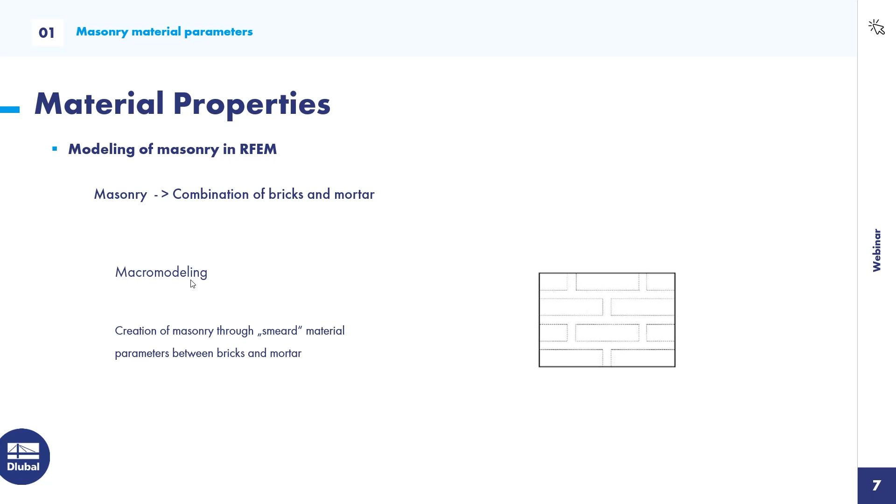The third and easier modeling approach is macro modeling. Here you create the masonry as one surface, and the material models and parameters between the bricks and the mortar are smeared across the whole surface. This means the modeling is easier and faster than the other two options. One small disadvantage is that if there is a crack anywhere in the masonry wall, you could not exactly define the location, maybe in the mortar joint, because the parameters are smeared across the whole surface. But this macro modeling is what we use in RFEM.

So what do we need for material parameters in RFEM? For the first step, for computing the internal forces, we only need the modulus of elasticity and the shear modulus. This is everything we need for the first step.

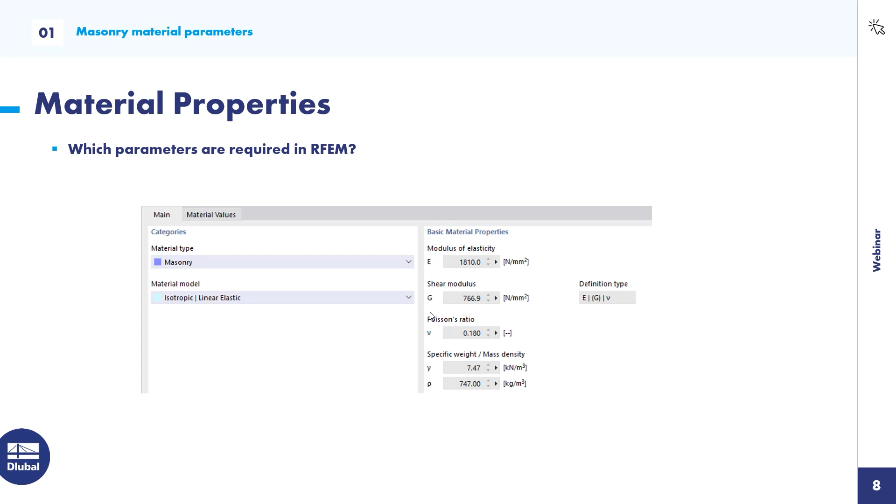So how could we get an idea about this elastic modulus and shear modulus? Here we find an answer in the Eurocode. The determination of the E modulus is defined by one factor: about 1000 for clay, in a range of 800 to 1250 for calcium silicate, or maybe 2050 to 2700 for manufactured stones.

This factor multiplied with the characteristic strength FK gives the E modulus. For small stones, for historic stones, you can add a factor for a small reduction of the E modulus according to the height of the brick and the reference height. The shear modulus is quite easy because it is 40% of the E modulus in this direction.

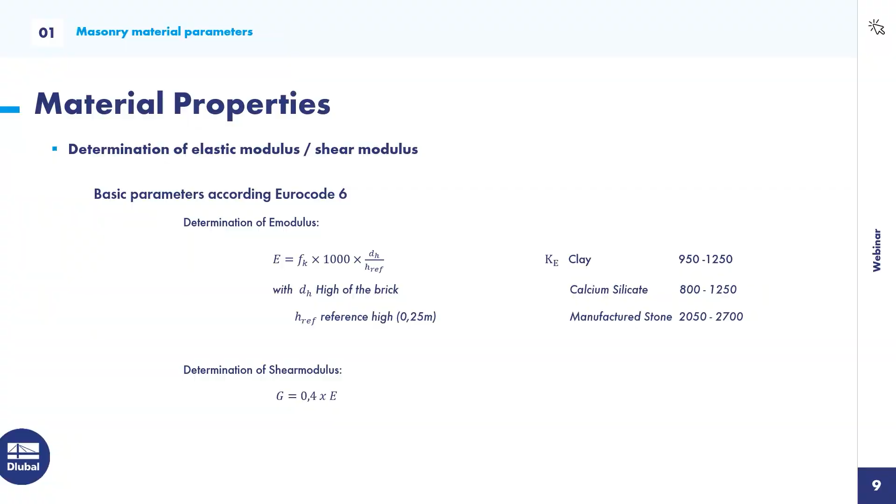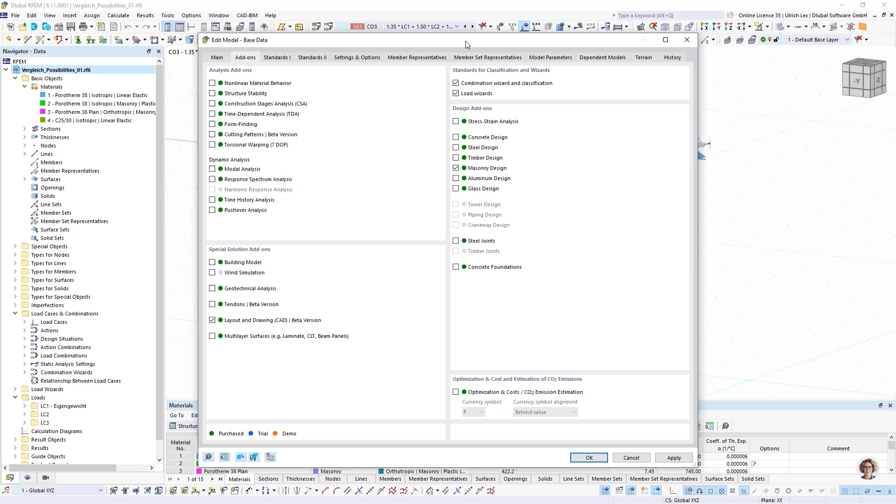As before I start modeling something, I want to check if in the add-ons in the base data my masonry design is checked on, because this is the most important thing if I want to work with masonry.

Today I prepared a small example. It's one wall with a slab and a defined load above. I want to show the differences between the material models. That's why I have created some materials, and I want to show you the differences now.

The first material is the isotropic linear elastic material model. This is our basic material model. It's the same for concrete or steel surfaces. You only need one E-module, elasticity module, and shear module to compute the internal forces.

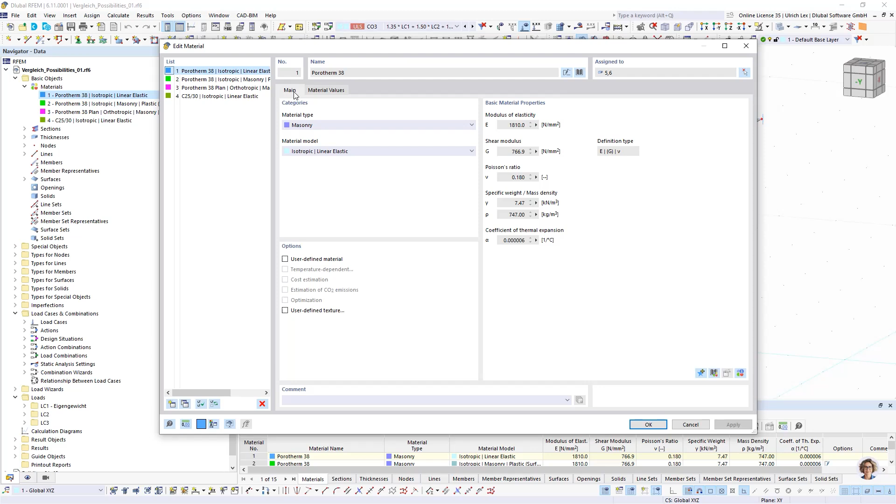When you have chosen the material type masonry, you have here the possibility to create also an isotropic masonry plastic surface material model. This means the isotropic option is that we have one E-module for both directions. In X and Y direction, we have only one module of elasticity.

With this plastic option, you can say that the limit stress for tension is reduced, because masonry cannot handle any stresses for tension. The wall will be cracked if tension occurs. The difference to the first material model is that there, tension can be computed. In this isotropic plastic material model, it cannot.

Here you have the possibility to cut a limit of tension. But be careful, directly inserting 0 is not good, because the calculation will not be good for a value of 0. So you have to insert a small value.

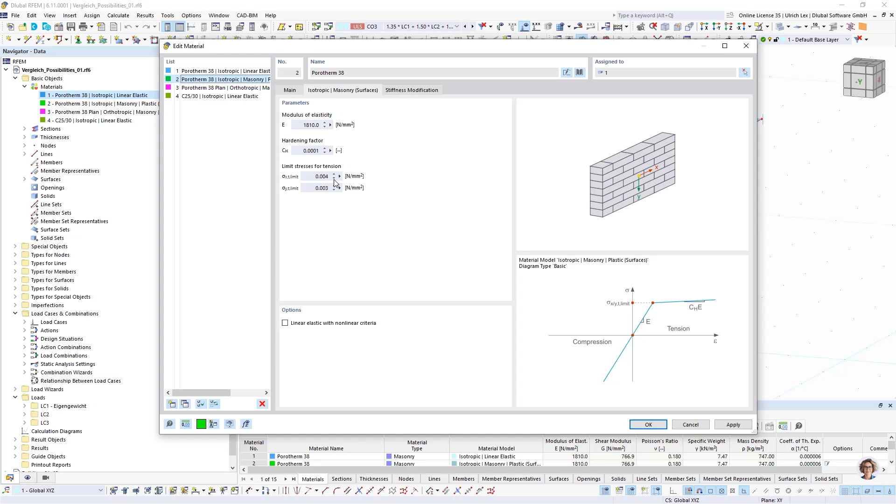The third option is the orthotropic model, and I would say it's the most exact material model for masonry, because here we have a different module of elasticity for the Y direction, the strong direction, and the X direction, the weak direction of the bricks, and a shear module is considered too.

Additionally, you can limit not only the tensile strength, we have also a limit of the compressive strength, and these allowable values from tensile and compressive strengths are computed according to the Eurocode. That would mean, if the calculation with this material model is done, then the design of this wall is done too.

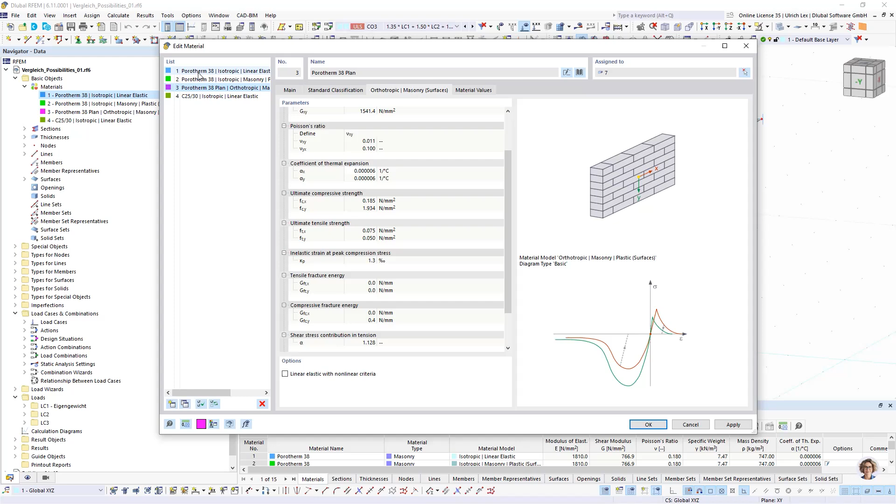So these three different material models we have in RFEM. As a last option, we have one type of thickness. We called it shear-free. You can choose it in the thickness type wall shear-free.

That means if you choose this thickness type, this wall can only transfer vertical loads from the top to the bottom, but no shear loads of the system. I will show you later where you can use this thickness type.

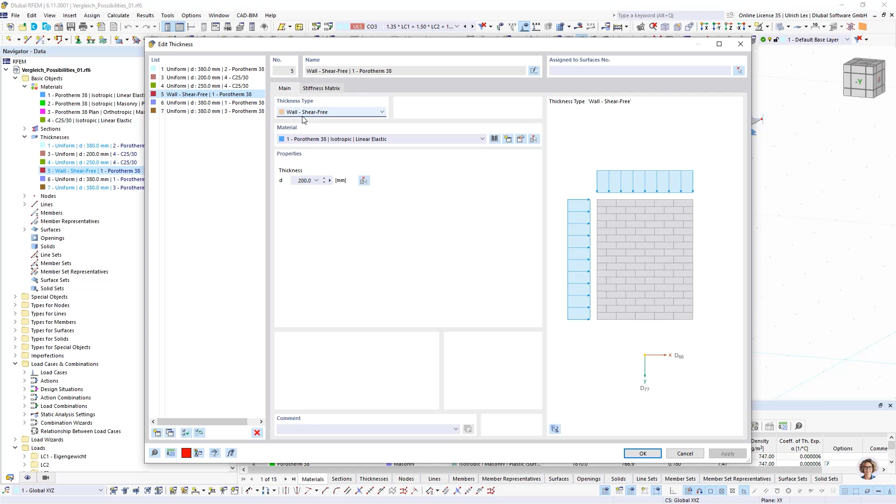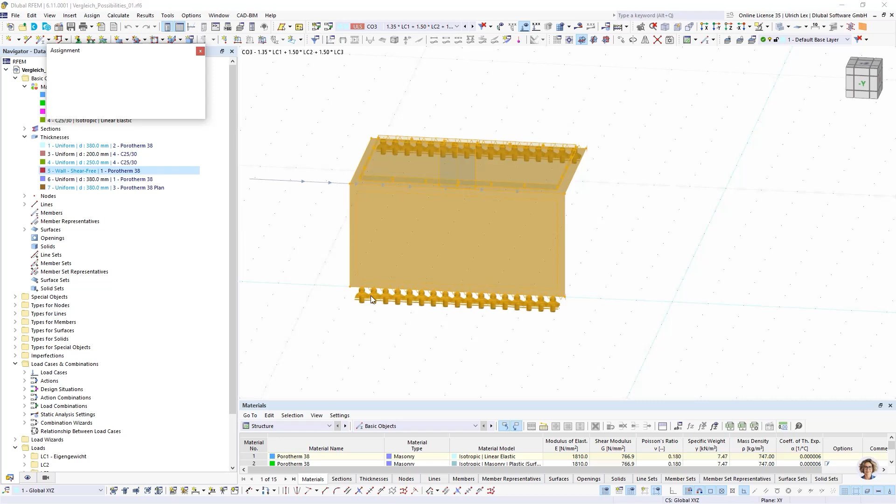Okay, to our system. Here I created one masonry wall with a slab, and I want to assign this differently. I want to create more walls with copy, maybe in this direction, and copy the loading too. 1, 2, 3 times.

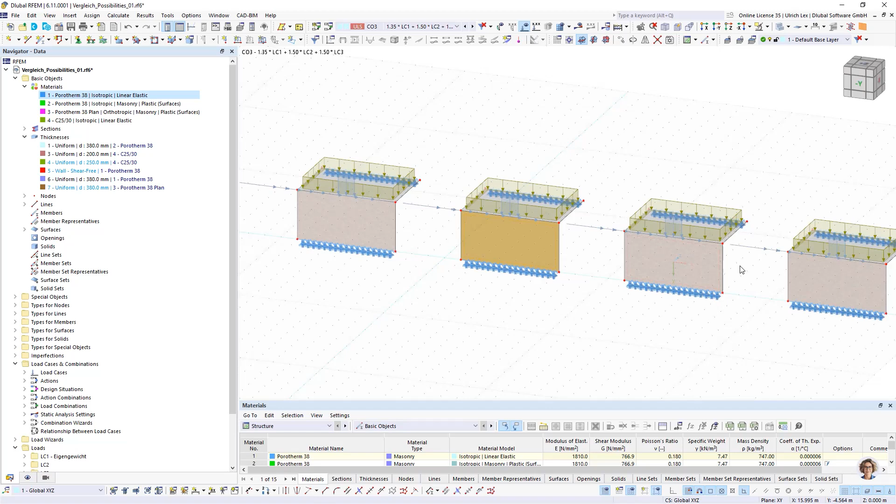So in the first wall I have to assign the isotropic material. In the second wall I want to consider the thickness with the isotropic masonry plastic. In the third case, I want to consider the orthotropic masonry plastic.

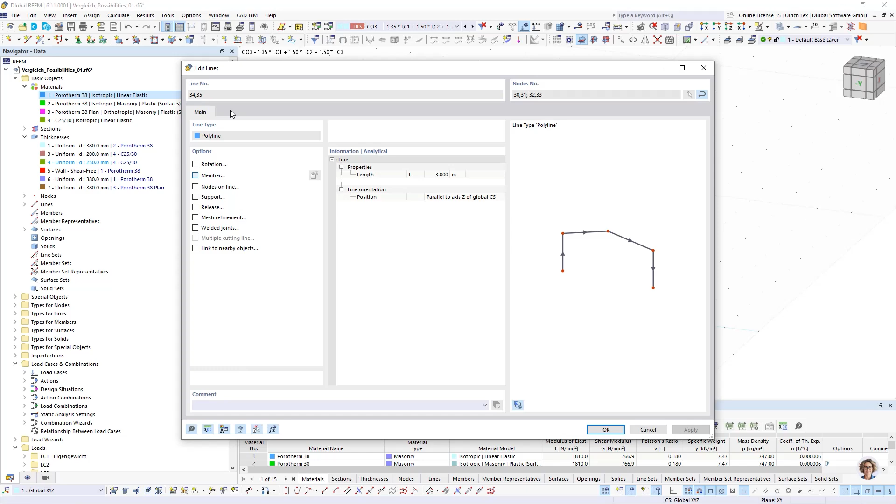And in the fourth part, I want to consider here my shear wall thickness type. For the shear wall thickness type and the horizontal load, I need some additional elements. That's why I added here 2 beams, 2 members as a column. Section from concrete. Okay, maybe for this case.

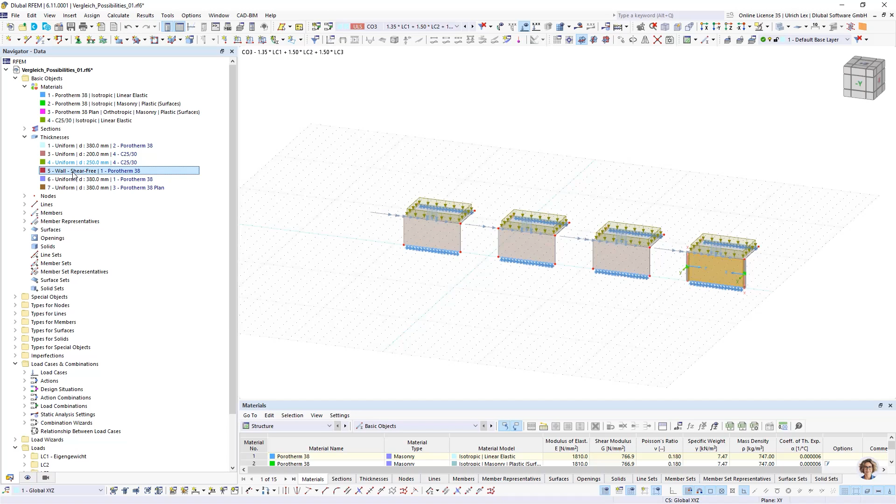So now I have defined in the first step the isotropic material model, the isotropic masonry, the orthotropic masonry, and in the last step the shear-free wall. So I want to take a look at the easiest load, the vertical load.

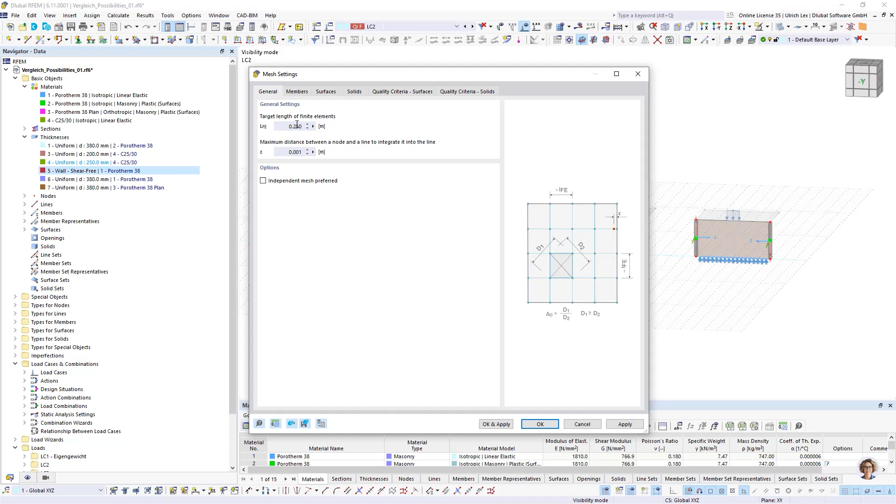A short look into the mesh settings. I have a mesh length of about 25 centimeters, and this is the value you have to use for masonry. Okay, now I can compute this first load case.

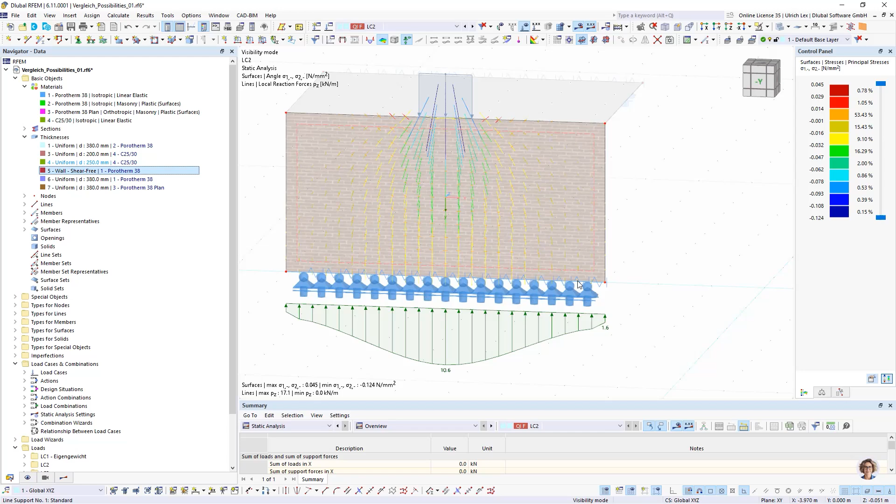So when we take a look on the results, I want to look at the stresses, and here I have something like the load trajectories, where you can see how the load is transferred in the surface. We see for our first isotropic system that the load is transferred above the whole length of the wall. This is not as expected, because we would think that the load is transferred in an angle of 60 degrees, and the other parts of the surface would not get any force. But for the basic isotropic linear elastic material model, it's not as expected for masonry systems.

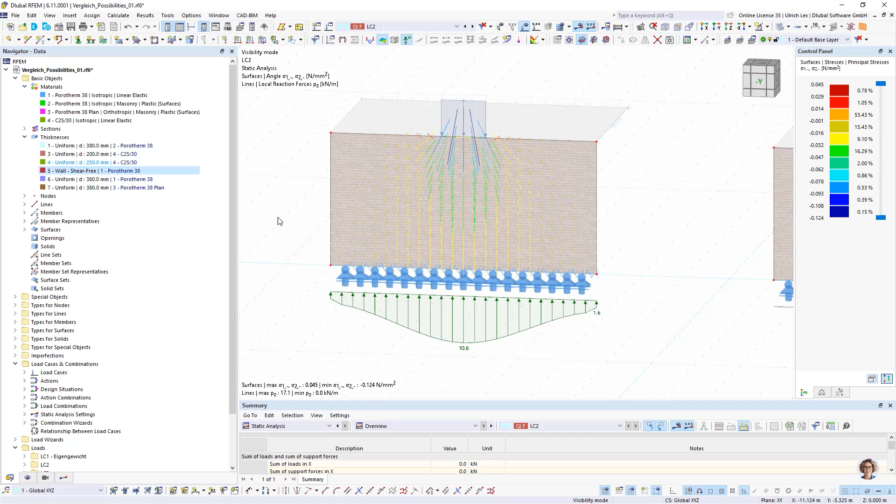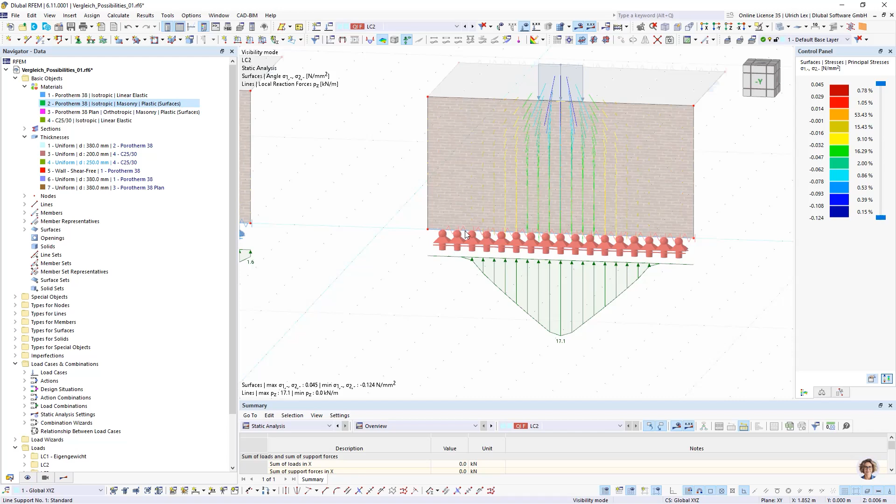When we take a look on the second system, it's better. Here we have no tension force in the system, and therefore I do not have such a big transferring to the sides. You see on the support reactions that the load is transferred in some angle from the top to the downside.

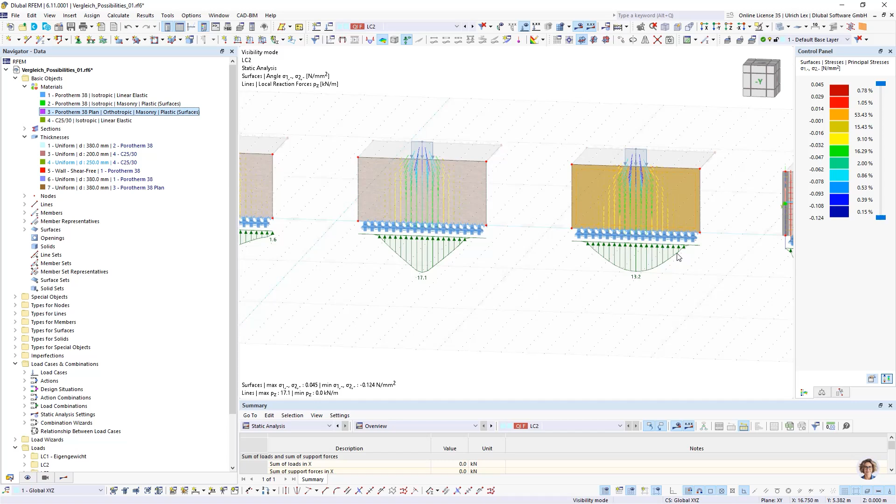When we take a look on the orthotropic system, then you can see it's better than the other two. It's more homogeneous, and it's transferred like expected.

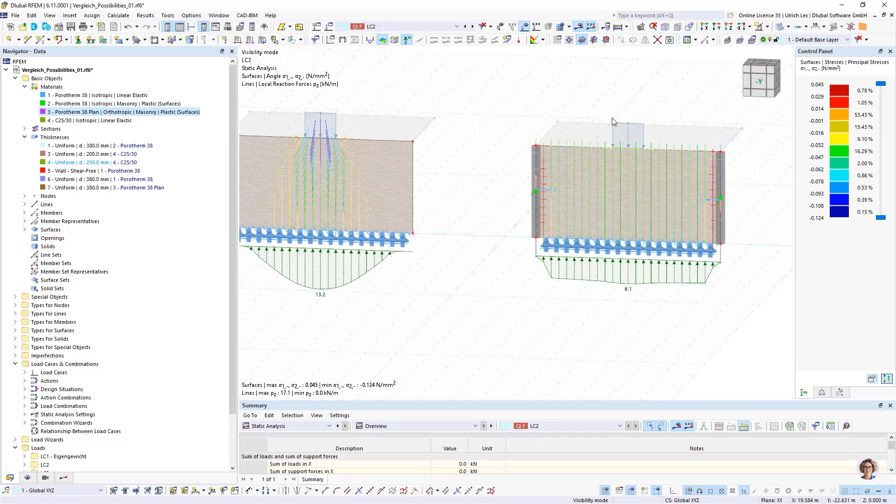In the last part, you will see that there are only vertical loads in the system because of the members on the side. You have a homogeneous transferring from the top to the bottom, but you have only straight loads in the system. It will be more clear when we have this horizontal load in the system too.

So when we add this horizontal load, then I want to take a look on the load combination, because in case of a horizontal load, you always need a vertical load, maybe self-weight or an additional vertical load too, because masonry cannot handle tension forces. You cannot compute only horizontal loads on the system.

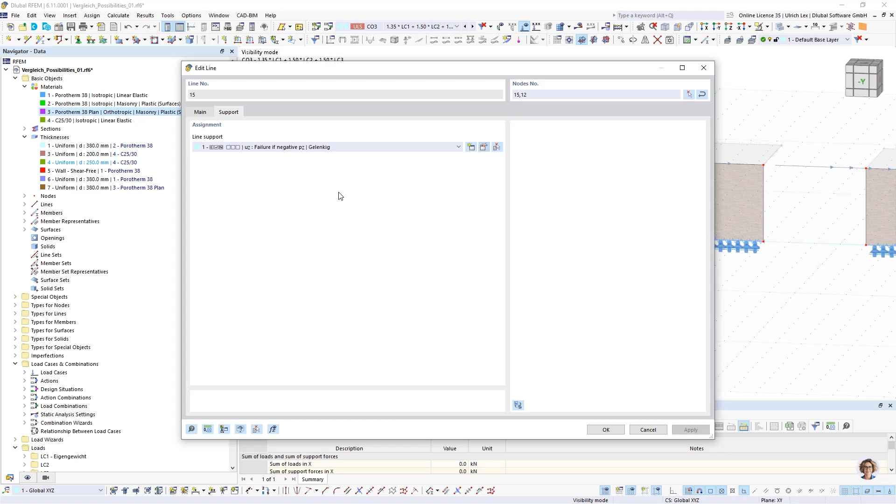For this calculation, I have to modify the support conditions. I have to fix it in X direction. And now I can compute this load case again.

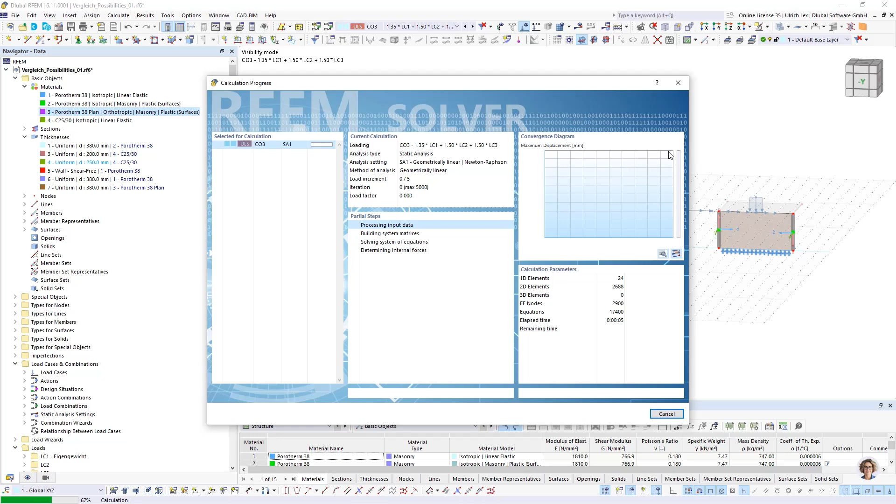Here we can again see that the load transferring of the internal force of our isotropic system is not as expected in the system. Here I can change it one more time, then it's more clear. I can deactivate the nonlinearity, so we can also see the tension in the system when we compute it again.

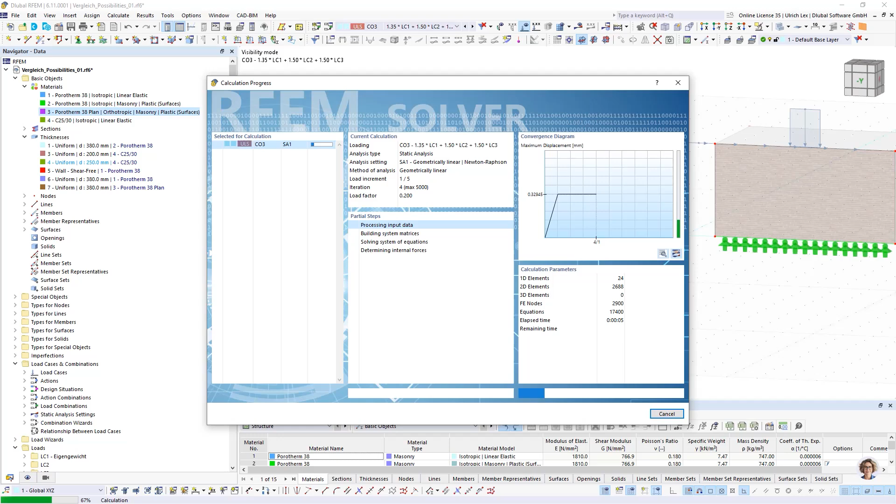Now you can see that in this isotropic material model, tension forces are also inside the surface, and therefore the load transferring is not as masonry works.

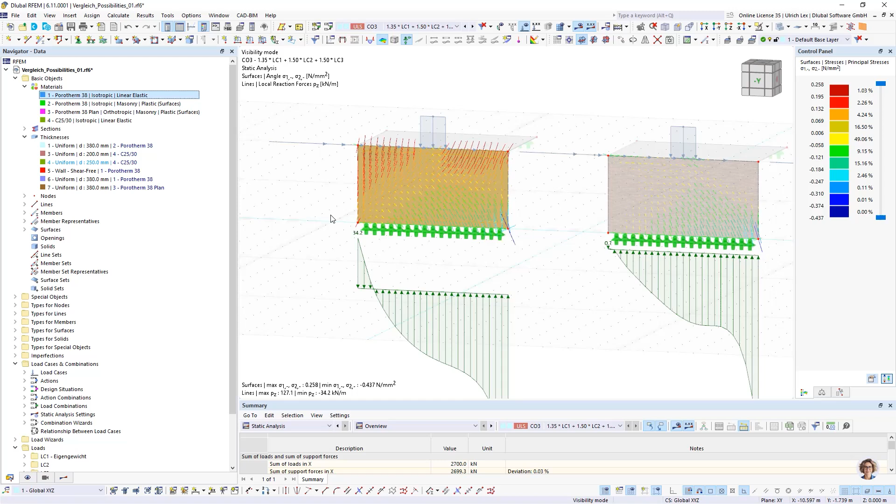So in our isotropic material model, it's quite better. You see that this horizontal load comes into the surface and is transferred in this direction to the bottom of the surface. It's like expected, but because of the fact that we have only an isotropic system, the E module in both directions is the same, and this exact shear behavior of the masonry is not so well considered with this material model.

The most exact system is the orthotropic one. Here you can see that only compression is present like it's defined in the material, and the pressure is transferred in the right way.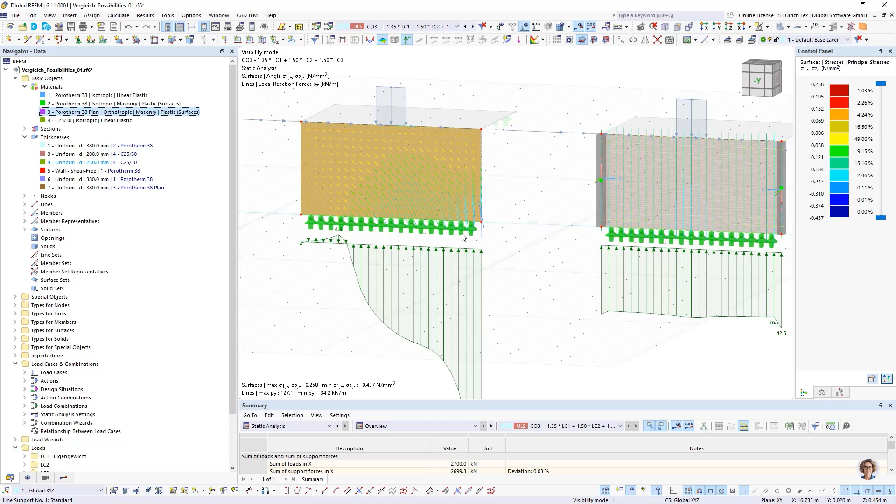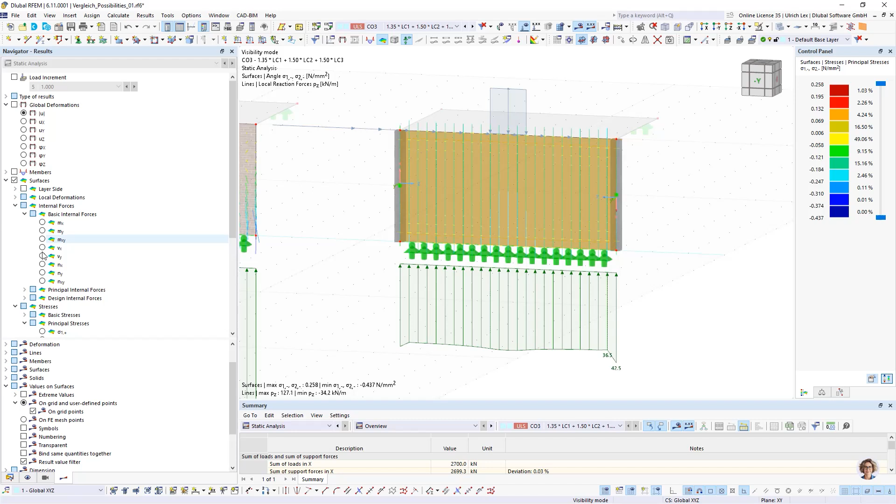To the supports. In the last option, you will see that the masonry wall gets no horizontal loads. There are only vertical trajectories in the system. Here also we can take a look at the internal forces. We only have vertical loads Ny in the system.

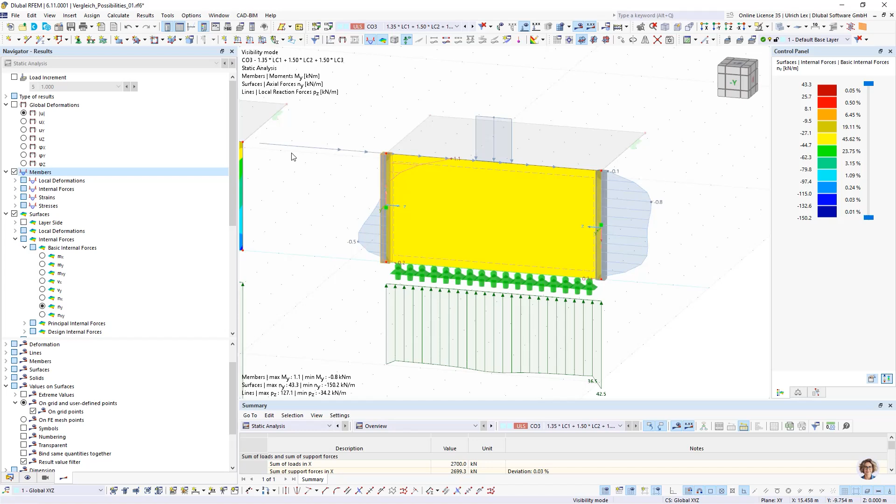This horizontal load has to be created somehow. That's why I added these concrete columns. You see here is a moment in this member, because this surface cannot handle shear forces.

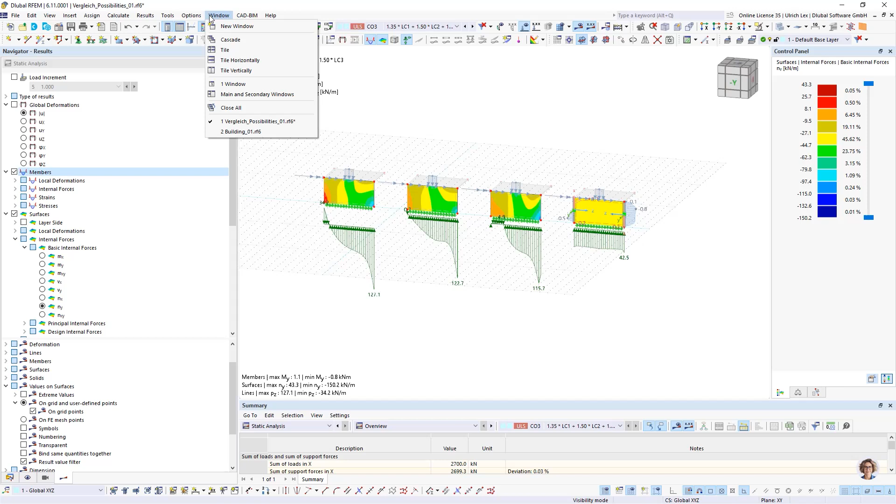Okay, this one was the explanation of the different material models, and on this part I want to switch to the second example, to a small building where we can create the masonry walls and compute this. So I have created some building, 2 floors with concrete slabs. In the front, some columns in concrete, and in the back I want to consider masonry walls.

Therefore I defined some materials: one, the isotropic masonry material model for the surfaces that should act for shear forces, and for the walls inside the building, I do not want to consider shear. There I have to create the isotropic material model and want to use the thickness type wall shear free.

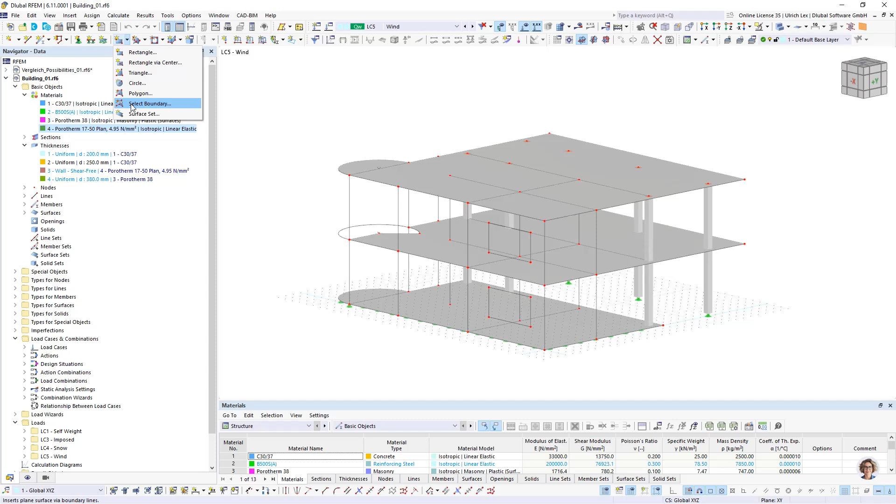So when this is defined, I can continue with creating the surfaces. I use the option boundary lines. I choose my thickness, and create the walls. So it's quite easy when the lines are there.

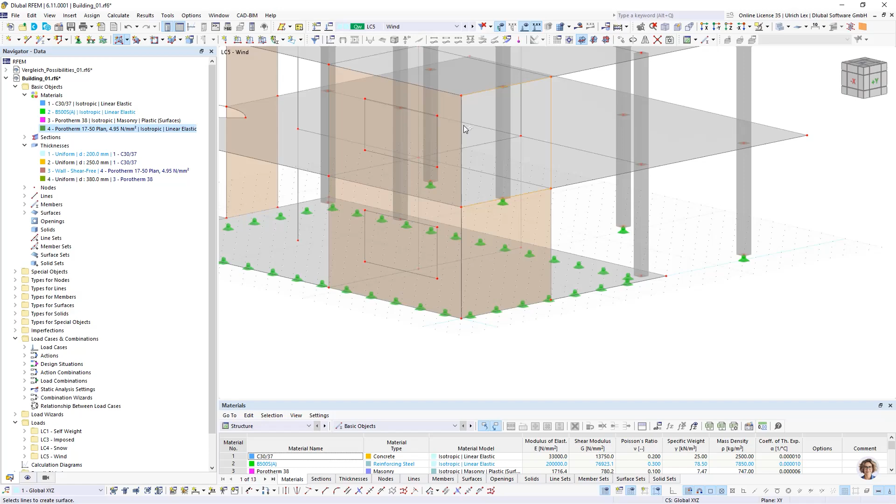For the inner walls, I want to use the thickness shear free and create here my inner walls.

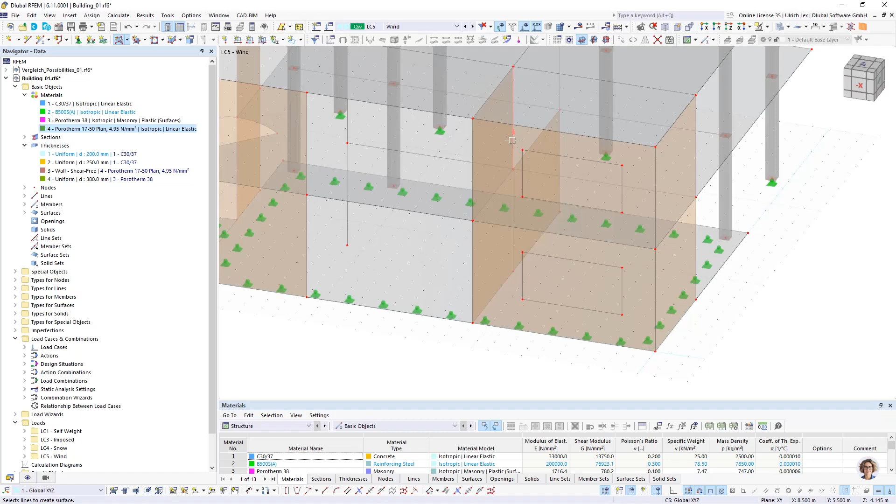So, upside, I have here one wall. Here I see there is no column. I want to add it here as a member with the section in concrete.

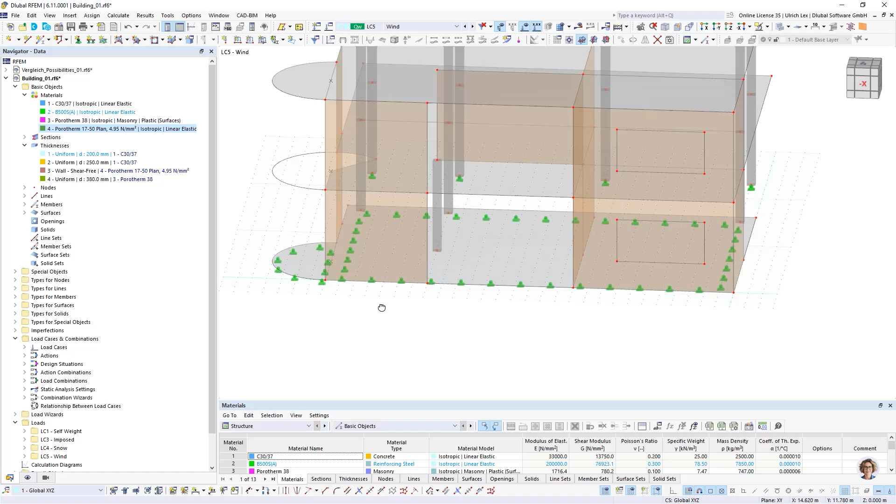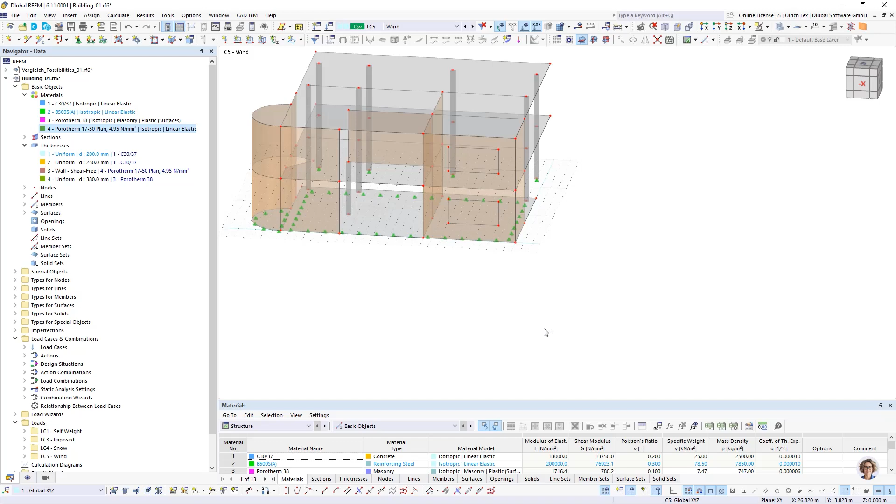Also a curved surface is no problem, but I have to use the quadrangle surface. One, two, three, and four. So then all walls are created.

On these surfaces, I want to add a window, maybe an opening. Here I can use the option graphically and select only my lines. The opening will be created automatically.

On this part, it's important for masonry that when we have some big openings, we always have to assign something like a lintel above the opening, because the masonry cannot transfer or handle tension forces.

If a big load is assigned, or if the opening is too big, then there would be a lot of tension forces, and this would lead to an instability of the calculation, because the wall cannot handle tension forces, and they could not be transferred to the side. That's why we have to add something like a lintel.

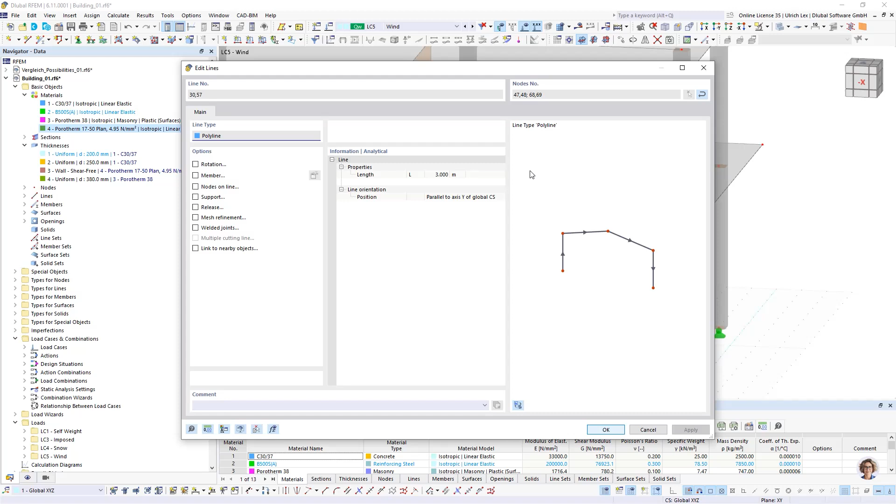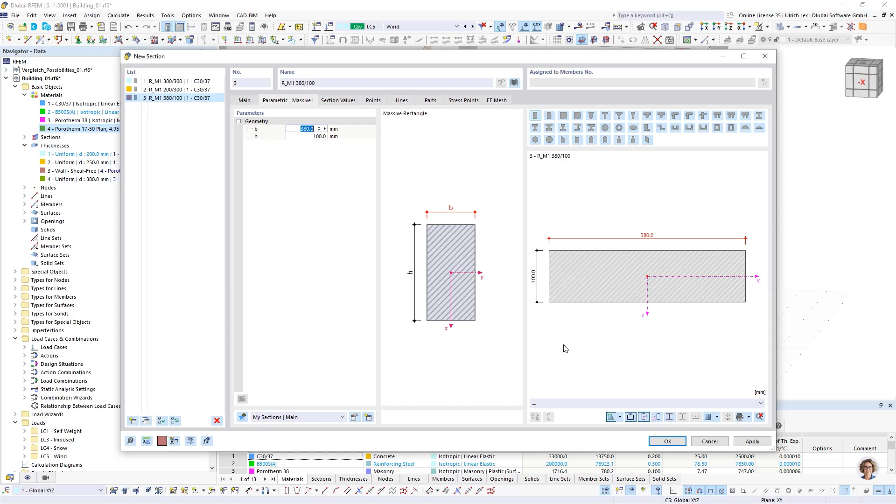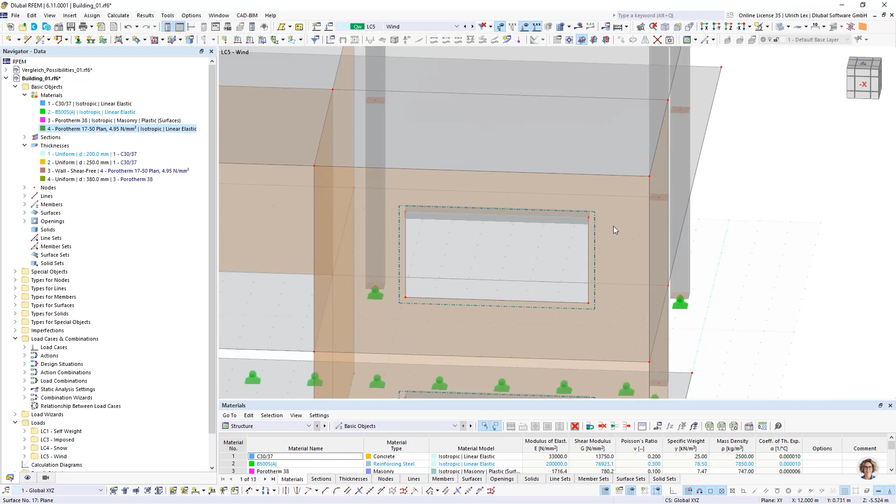I assign a member and create here a new section, maybe with concrete, with the width of the wall, and the height maybe 10 centimeters. For bigger openings, it would be good to create it inside the wall a little bit, so that the load is not transferred on one point here, but in this case it's okay in this way too.

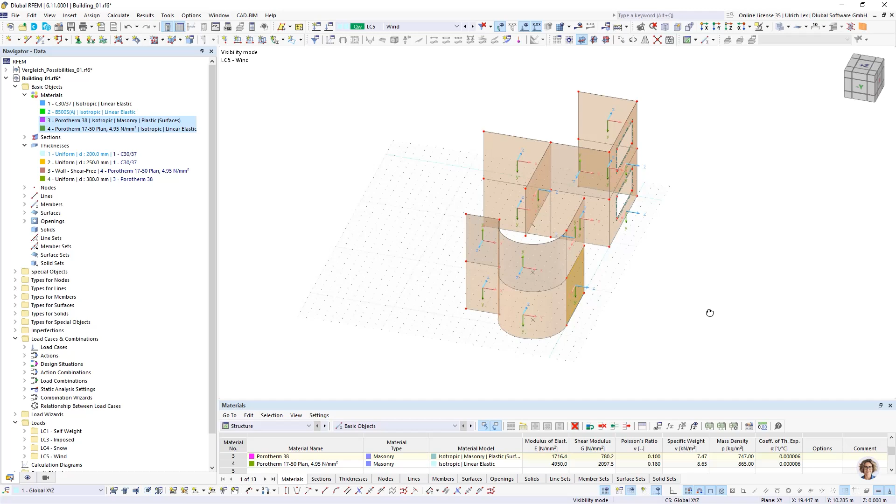Okay, then as a next step, I want to take a look. I want to select all my masonry walls and take a look on the axis systems, because it's better for interpreting the results when the local x direction, or the local axis system, is oriented in the same direction.

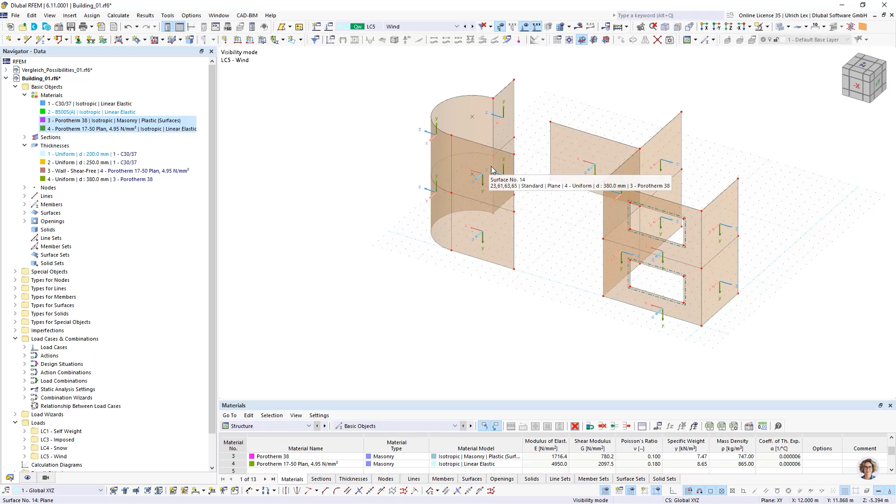Maybe local z goes outside of the building. Therefore, I have to reverse this, and then I can say, when I take maybe a look on the stresses, that all stresses with positive sigma x are outside of the surface, and sigma x negative is inside of the surface.

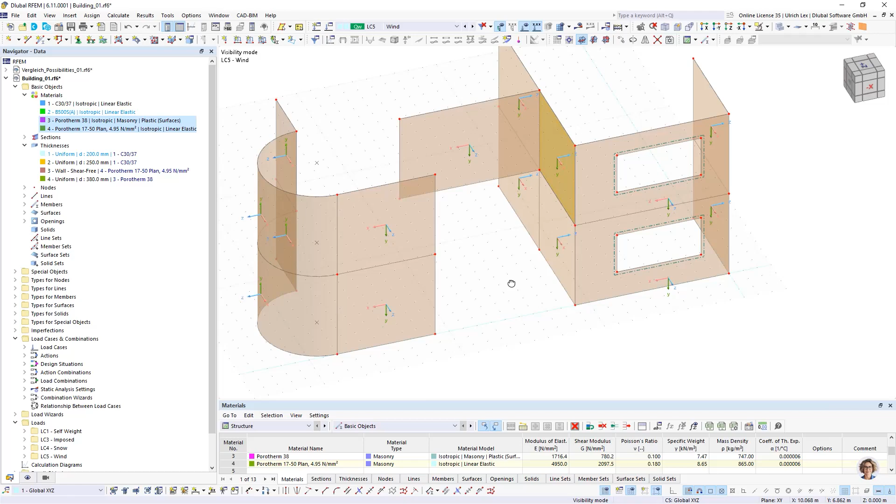Here it's okay. This wall is oriented in a different way. And then it's okay.

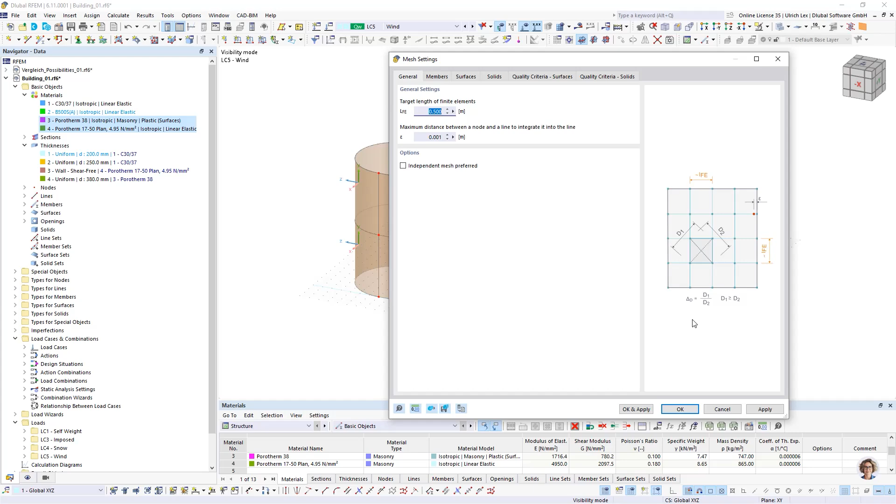As a next step, I want to take a look on the FE mesh settings. Here globally 0.5 meters assigned. It's okay for the concrete elements, I would say, but for the masonry I would use a finer mesh. Therefore, I can select all surfaces, edit, and assign mesh refinement.

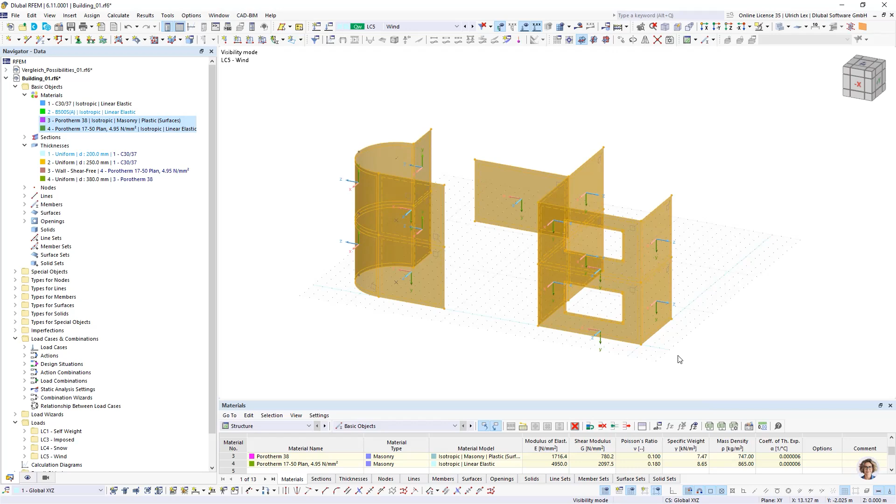I can create a new one, 0.25 meters. Okay, and I want to check it, if a nice FE mesh is created, or if I have to refine it in another part. It looks good in the steps, then everything is okay.

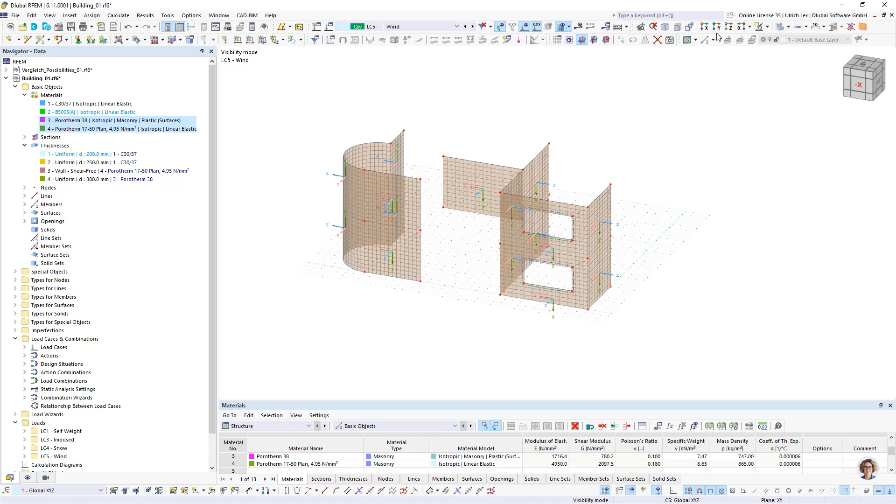So then I think we have finished the modeling.

Then we can take a look on the loading. I want to deactivate the local, so we can take a look at the loading. I have created a load case for the self-weight, for the imposed load, a snow load on the top, and I want to design some wind load in one direction, here in global X direction.

Here I can create a new additional surface. Again, I can select the boundary and use the stiffness type load transfer. Here I have a lot of different options for how the transfer direction should be, maybe only in X direction of the surface, in Y direction, or in both directions with stripes, or the more exact thing would be the isotropic FEA option, but in our case I think the stripes are okay.

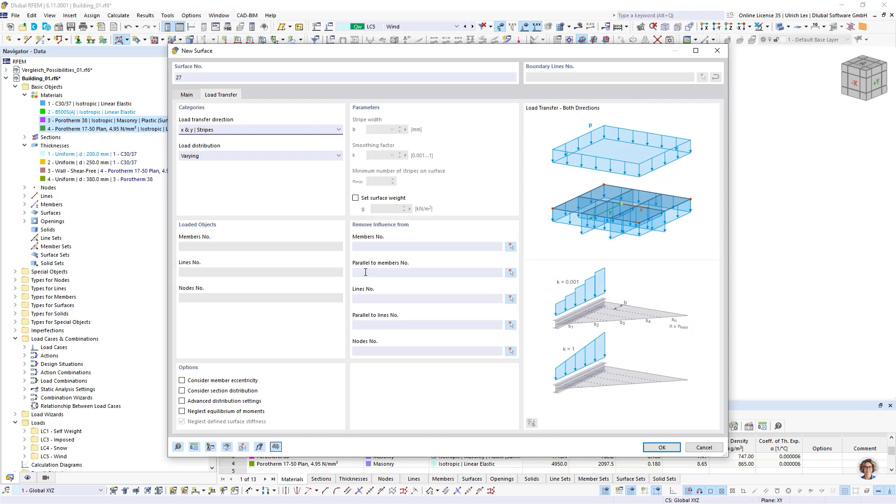I could remove some objects which should not be loaded. In our case it's okay. I can continue with okay, and create here this surface. The same I can do for big openings.

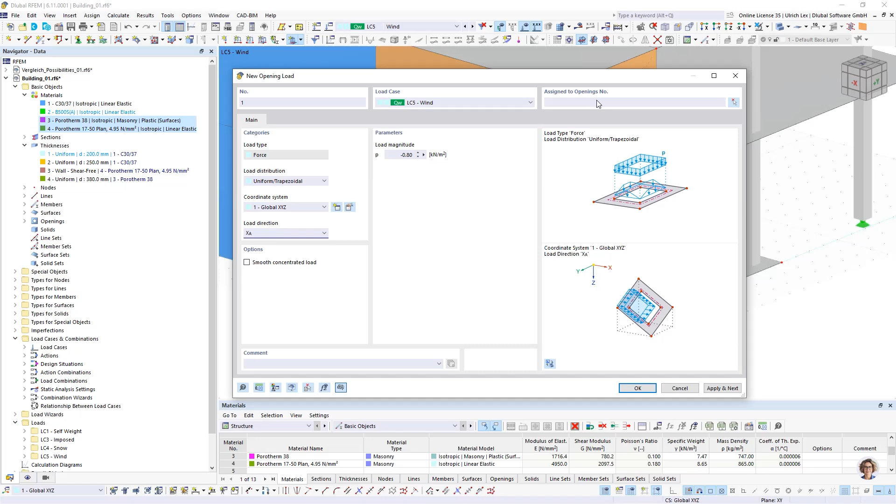For the openings, I would have a second option, to create directly a load with the new opening load option. Here I want to show both options. For the new opening load, I can use one value in X direction and choose opening. Then automatically this load will be transferred to the lines around the opening.

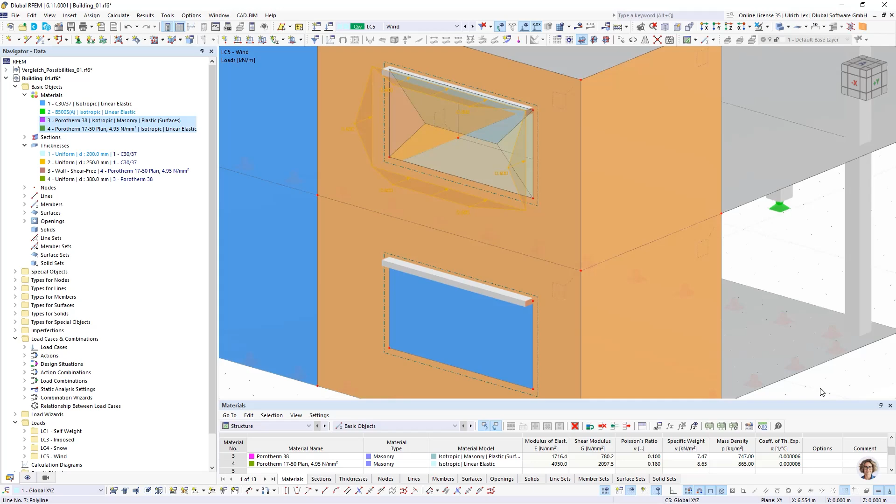I can show also the load on the boundary lines. So for the load transfer surface, I can use the default or the basic surface load, with the same value in my case, and choose the surfaces where it should be acting.

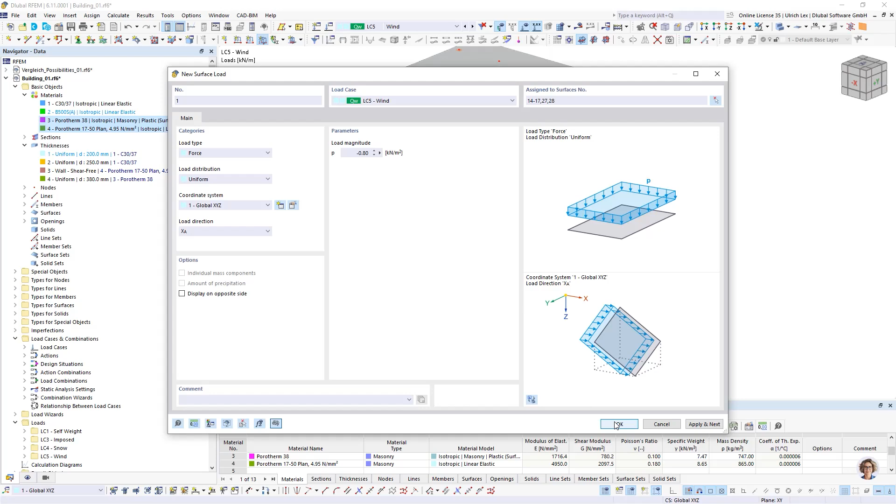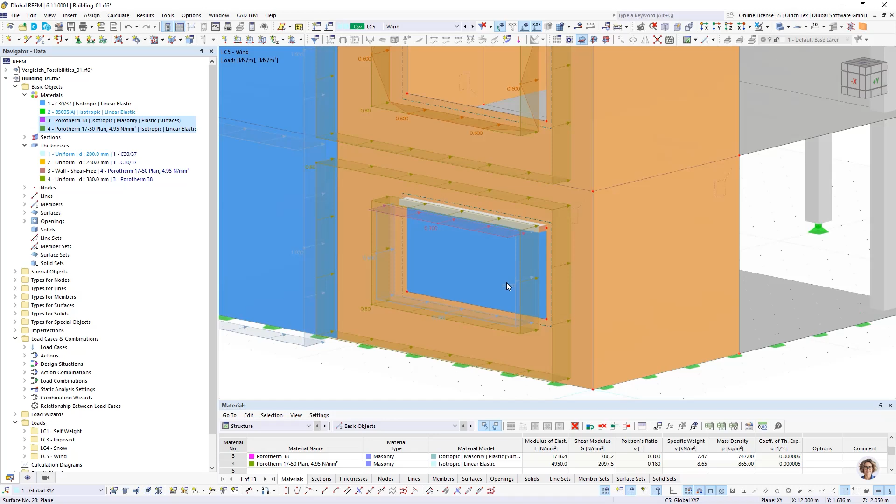Also for the load transfer, I can show the distribution surface, what is acting on the separate lines. Here you see it's transferred to all lines in a linear way in the stripes of Y and X directions.

Okay, if we have everything defined, then we can start with calculation. Here I want to compute maybe one load case to take a look on the results.

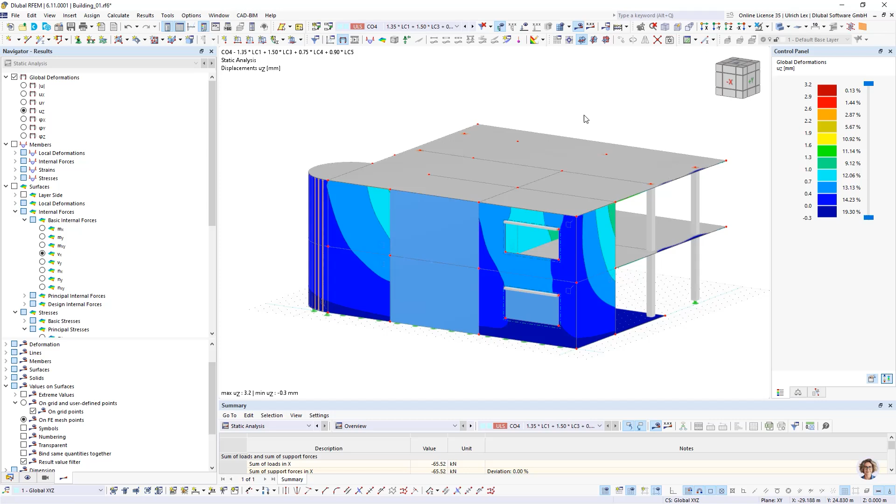The calculation was done without any errors. That's good, so everything is okay. Now I want to show you the results of these inner walls, where we had used the thickness type shear free wall.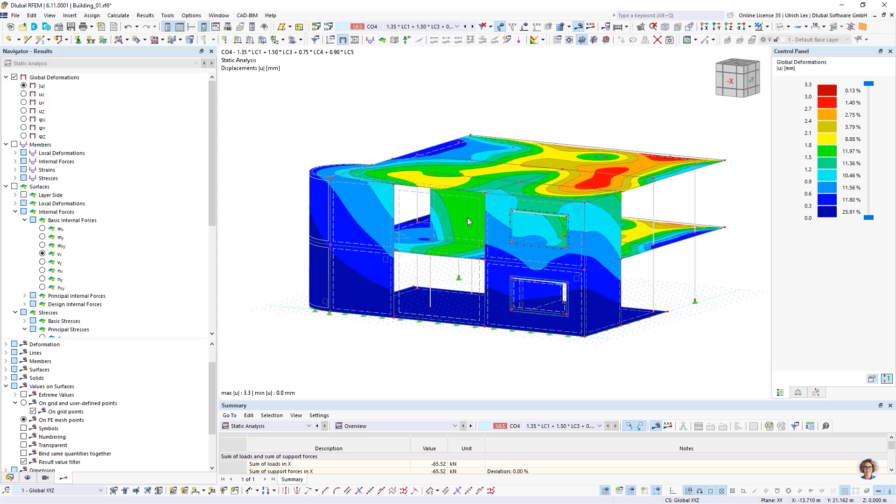I want to select only this. So here I can see when I take a look on the internal forces, the shear forces are 0. Also the moments are 0.

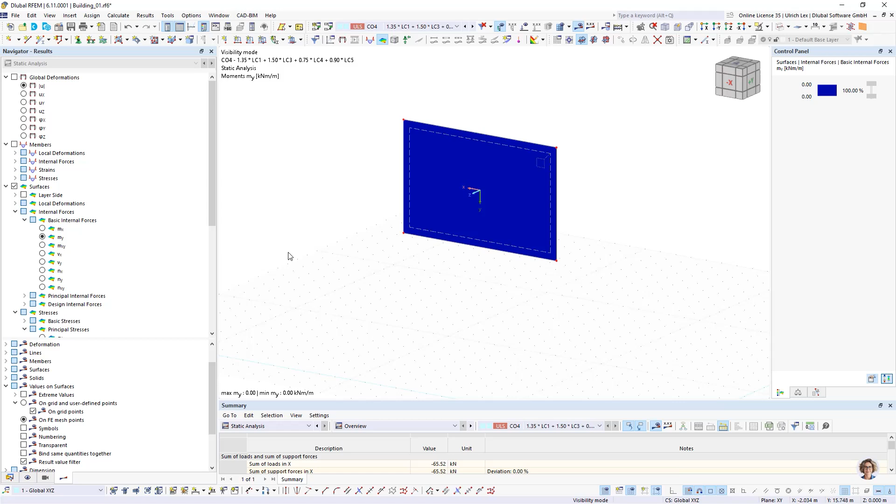When I take a look on the axis system, my nx is nearly 0. It's not exactly 0 because it could not be exactly 0 in calculation. So there are small loads in X direction, but I have big forces in Y direction.

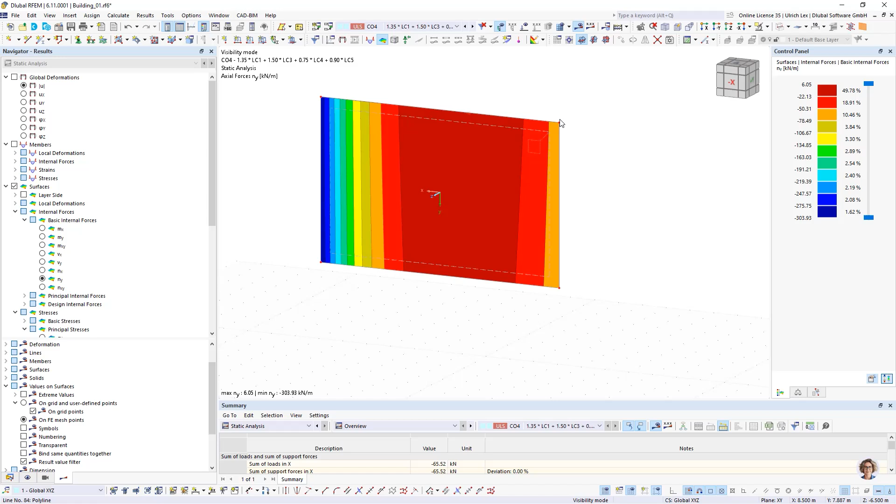Therefore, I have only loads transferred from the slab in the second floor to the slab in the third floor. That means this thickness type is good when I have masonry walls where maybe a concrete structure takes my shear forces and something else, and I want only the self-weight or a transferring from the loads from the upper slab to the slab downside. Then I can use this thickness type shear free, or this wall shear free.

In case that the masonry wall should also act for shear forces, then we should use this isotropic masonry or this orthotropic masonry.

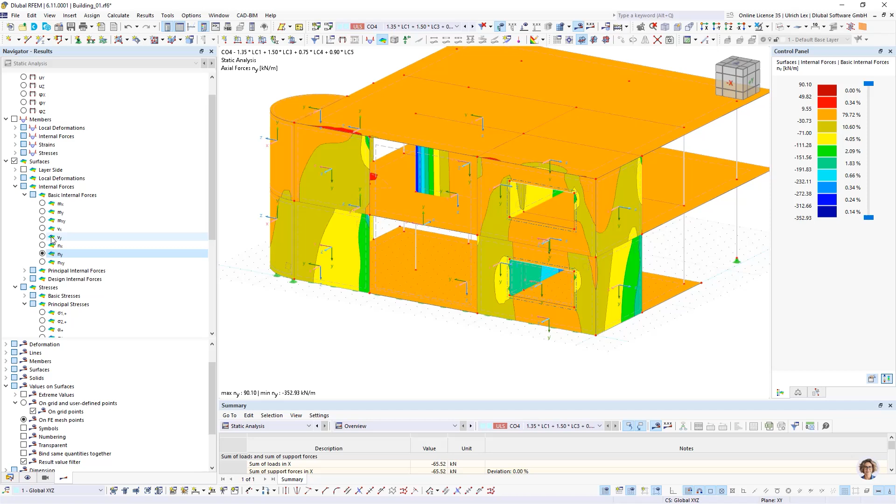For this isotropic masonry material model, I can now take a look here. Here we see that we have load transferring, we have stresses in X and Y direction.

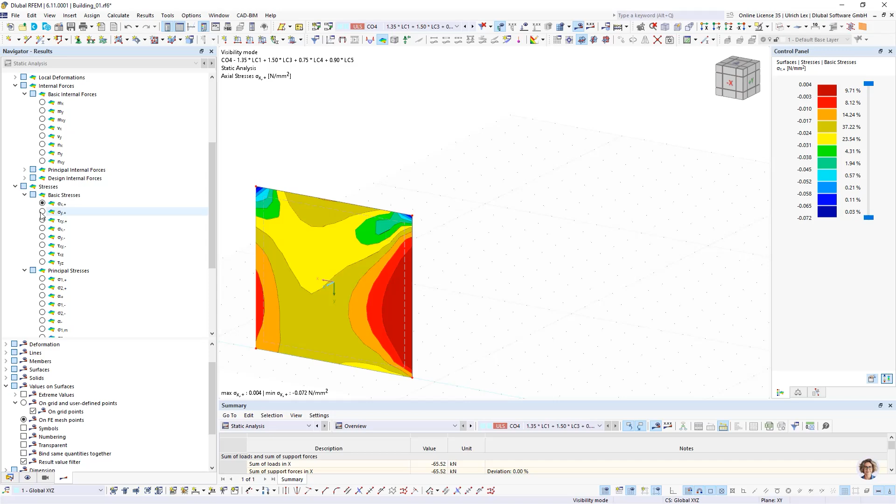When I take a look on this wall again, we see that we have only tension forces in the defined limit, and the other way pressure. So how could we interpret these results too?

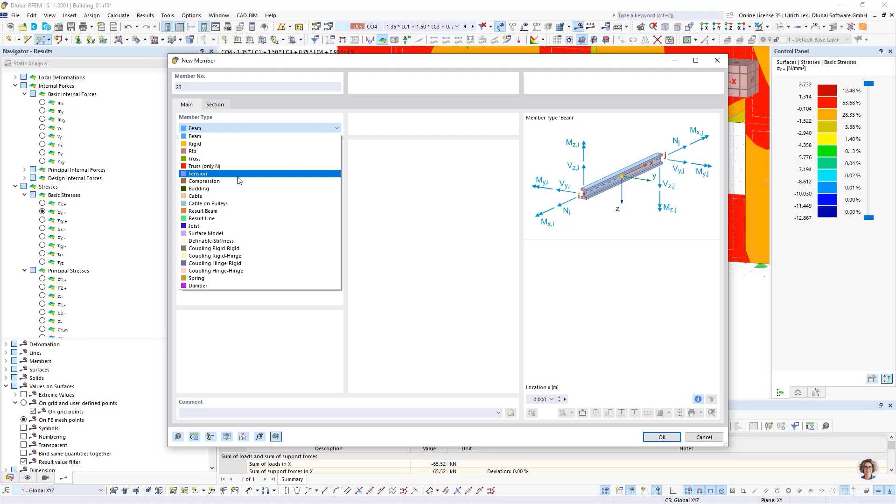You could insert here again a result beam. With the result beam, we could use a block with 1 meter, where we want to include objects, maybe only this one.

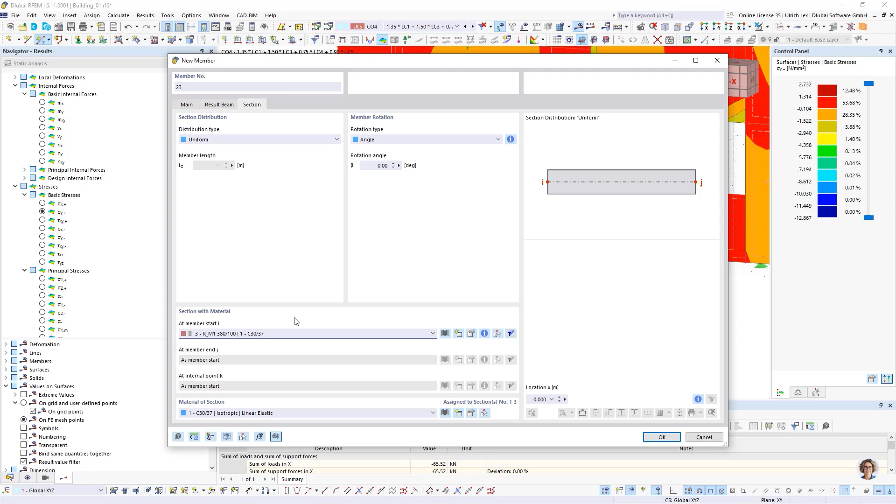Okay, I can create it, it's not important, but I create a new one. Stiffness, because the result beam does not have a stiffness. For the calculation, we have here 100 to 380.

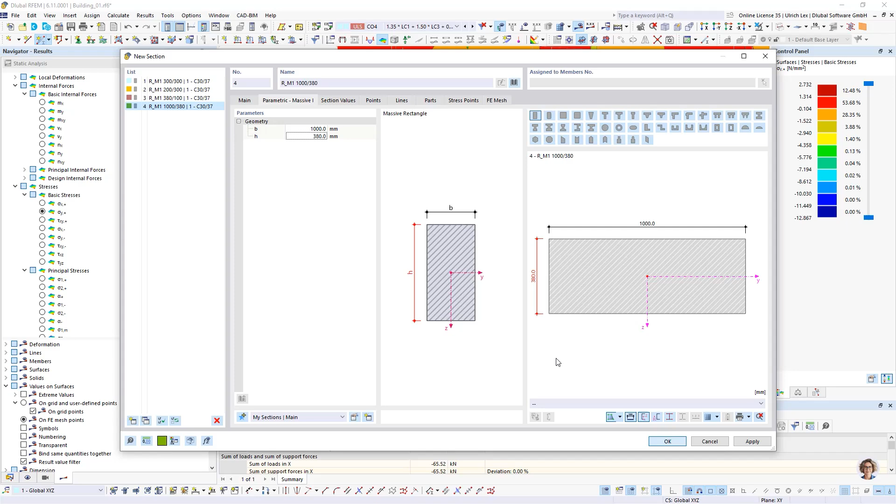Okay, and we can add it here. Then we have to recalculate it only because the lines are divided or integrated in the surfaces now. But this result beam has no stiffness for this calculation.

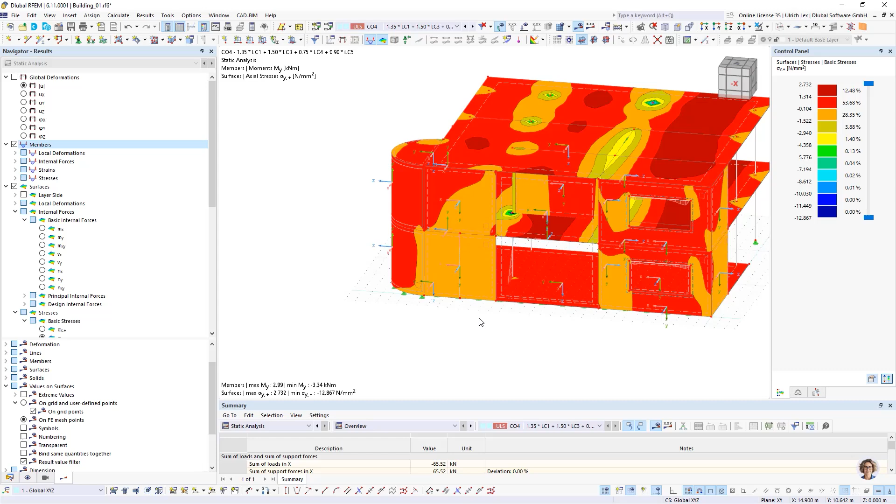But now you have the possibility to take a look on member results. Here you can see the internal forces, maybe for the normal forces.

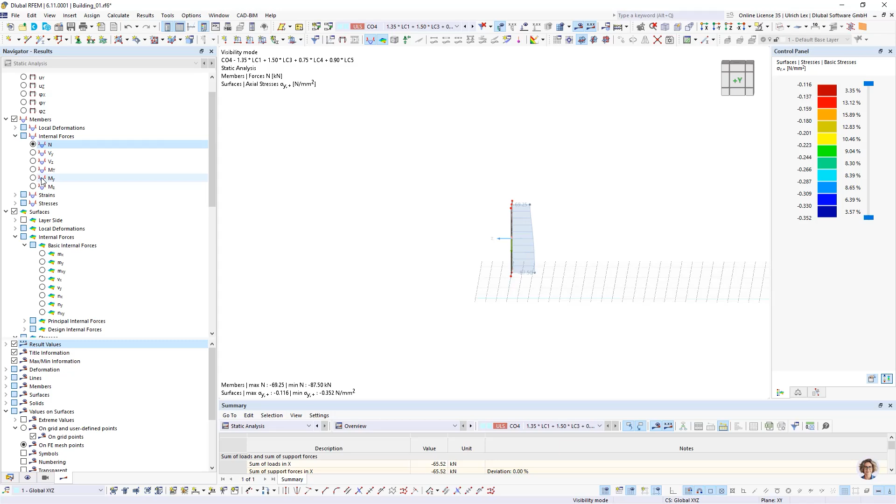For the normal forces or for the acting moments in this wall. Because we use this isotropic masonry, you could use now the results of this result beam for an additional design of the masonry surfaces too.